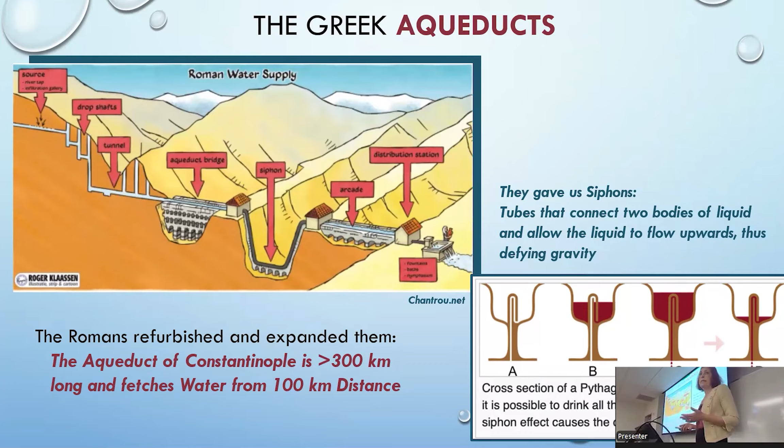Now, this didn't stop there. We see that innovation and ingenuity in Mesopotamia and their irrigation canals, really pretty fascinating. We see it in the way that the Egyptians handled floods in the Nile and used it to actually irrigate and grow crops in a very arid region. We see it in technology that they developed, this shadoof, the idea that you can haul water from one place to the other using what we now have more fancy names for.

And then you'll see the Nilometer, which is really a stage that measures water levels, like the ones you see under the freeways where we have flooding. They had that way back when, a long time ago. And then you'll see the Mayans, they had the first filtration systems, believe it or not. And you'll see the Indus had advanced urban, water, and wastewater engineering. So we're building on this great legacy of folks that have come before us.

Now we fast forward and look at what's happening in the United States in modern times. What you will see is that it took us a while, till 1872, to have the first filtration water treatment plant in Poughkeepsie, New York. And then beyond that, what motivated a lot of the water systems we work with today are the diseases and recognition that water is a carrier of disease unless it's treated and maintained and clean. So you'll see that chlorination began in about the 1900s, I would say.

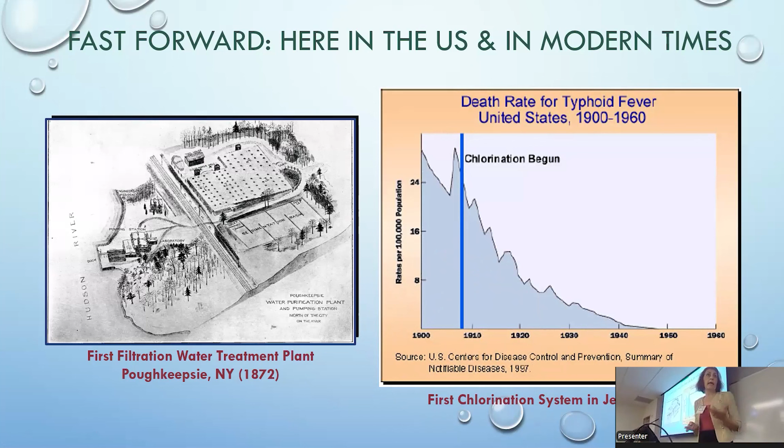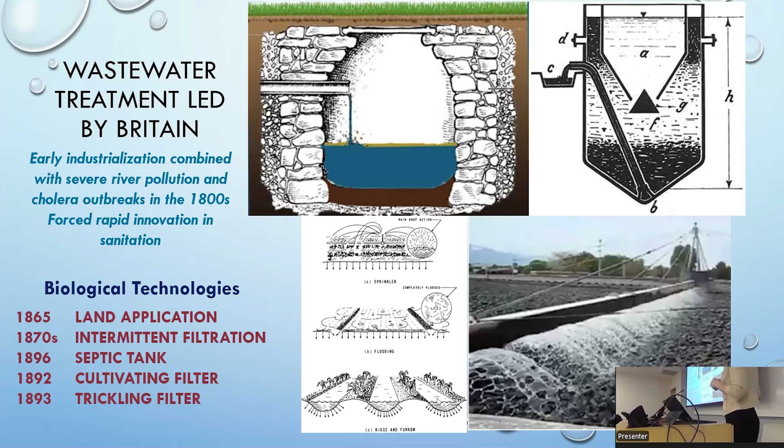And as a result, the deaths that came from all of these diseases started declining. Now the issue became wastewater, and Britain led the world with their technology. They did that because of all of the pandemics and outbreaks of diseases that decimated much of their population. So they gave us a lot of inventions, among them spreading wastewater on land application, intermittent filtration, septic tanks, and trickling filters, which you see here on the right.

Now, today we are at the cusp of having to change the conversation about water. What we're doing and have done to date is not going to serve us and is not going to work into the future. I'll tell you why, but I'll also tell you how we can get over that.

So first, we're going to talk about where water comes from. Believe it or not, a lot of folks really don't have a good handle on where water comes from. And then we're going to talk about how we design water systems today and why that is challenging to continue doing into the future.

I'll present a little bit about the Texas water story because we live in Texas. I live in Texas, I care about Texas and its water. And then we'll look at water from a different perspective, the economic perspective.

We then talk about desalination, perhaps in my mind an inescapable water future for most of the globe. And then we'll really make the case for the nexus of water, energy, and productivity, and water as the realm of the future engineer, where we have to be inventive and have the resources to get the job done, which is ensuring clean and safe water for everyone.

So, natural and unconventional water sources. We have surface water: rivers, streams, lakes, etc. We have groundwater, which we've depleted a lot of, aquifers, wells, and springs. Rainwater, that's where most water comes from, glaciers, and snowmelt.

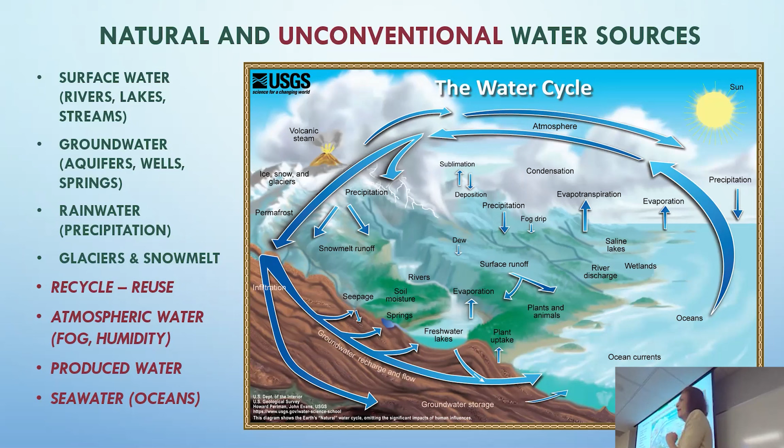Now recently, we began exploring what I like to call unconventional water sources, and these are recycling it, reusing the water that we've used before. There are technologies to grab water from fog and humidity. You'll hear about produced water today, so I won't comment on that, provided your speaker shows up. And then lastly, we're going to talk about seawater and the opportunities it presents.

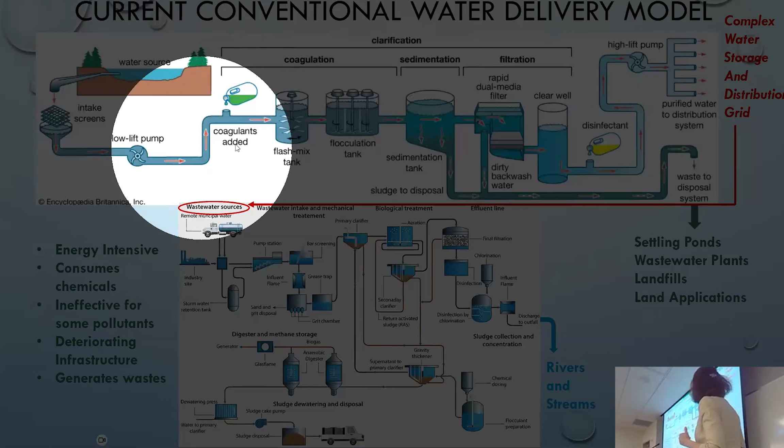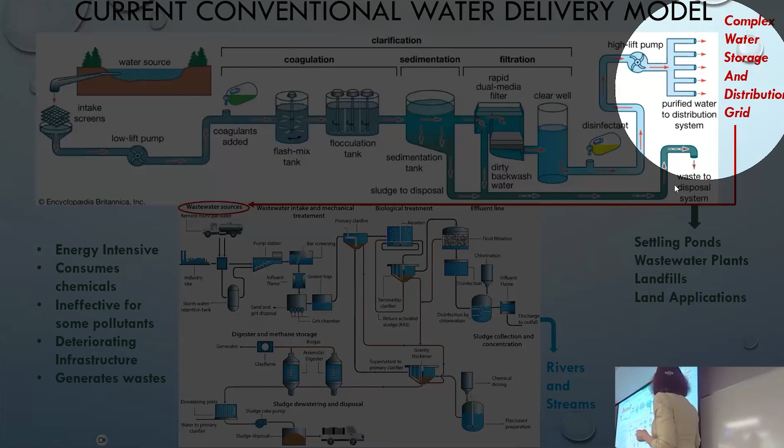Here's what we do to water today. Looks great, lots of work for engineers. So we start with a water source, usually surface water. We pull it out with an intake structure, and then we process it through these umpteen technologies that are quite heavy in engineering and technology, heavy on energy to run the water through them. And then we have distribution and storage, really complex networks.

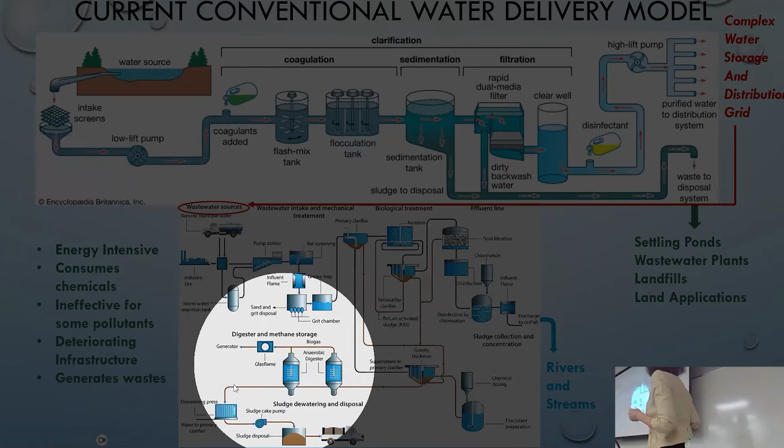When we're done with all that water, we take it back and put it in a wastewater treatment system, which is just as complicated. And the outcome is that the treated wastewater is discharged to rivers and streams. However, notice on the right, below the top picture, there's waste being generated, and the same happens with wastewater. We generate sludge, and that becomes biosolids.

The biosolids are spread on agricultural lands. So if the biosolids are polluted, then your food sources also have some of that pollution and could be harmful to humans.

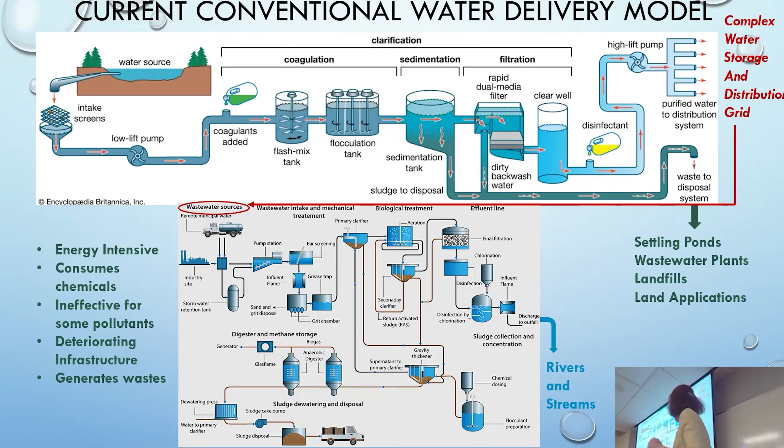So what is the issue with the current conventional water delivery model? From a technological standpoint, it's energy intensive, it consumes a lot of chemicals, and it's ineffective for some pollutants like PFAS and rubber from tires. I'll talk about that a little bit. And we, as you know, have deteriorating infrastructure, and the wastes that are generated are an issue that we have to deal with.

So other challenges with our systems are even more pervasive, because in times of water deficit, who gets to be first in line? There are many users of this water: agriculture, industry, municipal, commercial, the energy sector, environmental, recreational. So who has first in line?

And then beyond that, who's going to pay for new water sources? And how are we going to deal with emerging water users, mega users like data centers, which you will also hear about today?

Now some of the things we need to think about, be proactive: should we consider sharing water or transferring water rights or transferring water from one place to the next? And how would that work? Do you have the haves and have-nots? And how do you make that determination?

What to do when you have too much or not enough? These are the extremes of drought or extreme rainfall or hurricanes, whatever have you. And then is it likely that we can conserve enough to actually meet the demands? Is it likely that we can harvest from these really distributed sources like rainwater? What would incentivize people to do that? And then what about infrastructure retrofits to reduce water losses and conservation? How do we pay for all of that?

So that's what I'd like to talk about today, given that you are seeing these titles in headlines in the news almost every day. Wouldn't you agree, Louis, that this is from Microsoft?

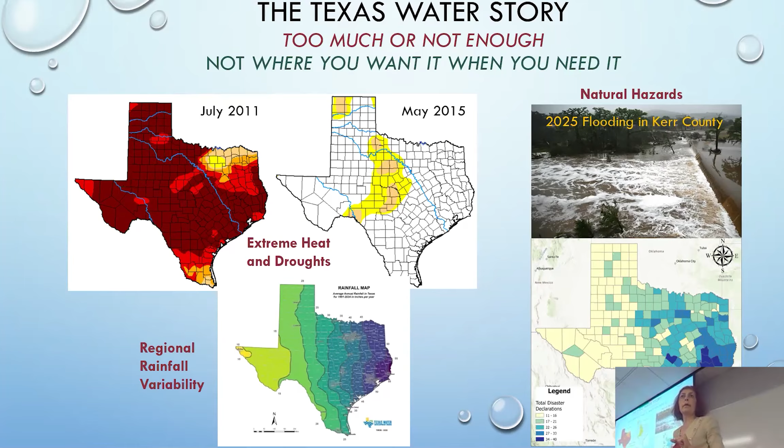We have flooding. This is just an image of the flooding in Kerr County. This is a map of all of the natural hazards that hit Texas, from droughts to extreme rain, hurricanes, fires, whatever have you. This is a disaster declaration count for Texas. So all of these things bring to mind that Texas, we have a problem.

And unfortunately, two strikes for data centers, according to a new report that came from Bluefield Research. Their theory is, their data demonstrates that the issue is not just the water use, but it's the power plants that are going to use more water to provide the energy for the data center. So that's where the two strikes come in, right?

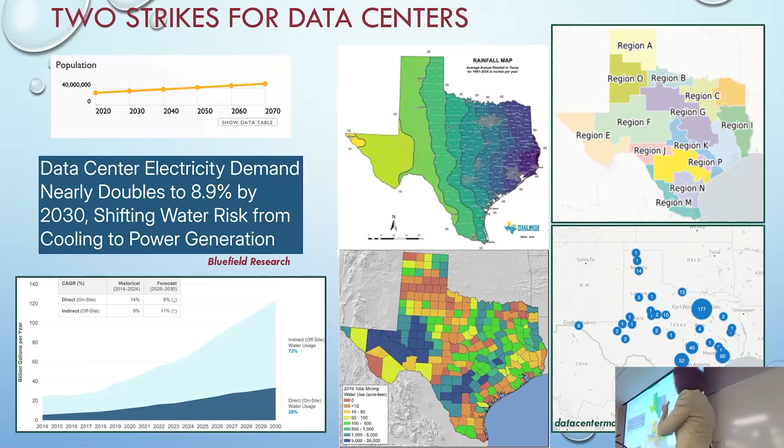So they're having to build power plants, get water for those, and they're having to use the water to cool the machines that are in the data centers. So two strikes for data centers that they're going to have to address, and this is real data from that report. It's online, you can look it up and read the report.

It's pretty interesting. So in the US in general, what have we done? We've had 125 years of US water spending. We've not been sitting idle. We have been paying for systems, right? But the thing to understand is the pricing of water needs to be better understood, and we need to price it right because it is the resource of the future.

Now, I'm giving here some examples. I'm not going to go into them in detail, but I get water from the city of Houston. I pay maybe about 5 or 10 cents a gallon on a good day. Now, if I use a lot of water in the summer, that number jumps up, right? But this is a gallon of distilled water that you buy from the store. You'll pay $1 to $2.50 for that gallon of distilled water. And the reason it's expensive is the cost of the amount of gas that goes to make that distillation system work.

And it's 0.15 gallon of gasoline equivalent in BTUs needed to generate that gallon of distilled water. The rest of the cost is in the plastic and trucking this gallon of water all over and selling it, and people have to make money along the way.

Now, what's interesting is in comparison, the price of gasoline, well, not today, I haven't filled up yet. At least it was last week, $3.10. I'm not sure what it's like today. But the point that I'm trying to make is that we spend about $1,200 per capita in the US on water. 2.2 billion do not have safe water. 40% of the world will face water stress by the year 2050. We need to price water right in order to get beyond where we are today, where there are these dichotomies in pricing, and we'll explain why.

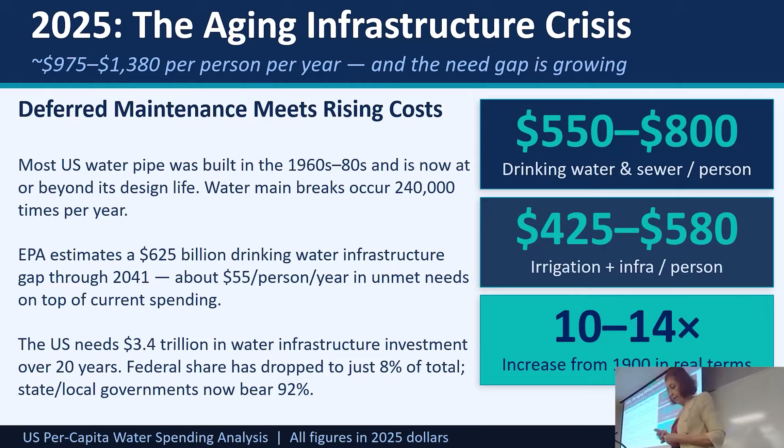So the difficulty or challenge we find today is you need to spend a lot more than $1,200 per capita. Somehow those funds have to be found. So the key takeaways: we have a big infrastructure gap, our pipes are aging, and we're spending far less than what we should to ensure safe and clean water deliveries.

Now, water demand is relentless. The fact is that it keeps increasing. We have population growth, urbanization and industry. We're going, as I said, from farming to manufacturing to information technology. So the water demand per capita is going way up.

For factories, plants, cooling systems, they all require water. And then data centers and AI, the digital economy, we call it water hungry. One data center can consume about 3 to 5 million gallons per day. A family of four typically would use about 5,000 gallons a month. So you can kind of think about the equivalent number of people that are replaced by the need for that data center.

And then we have more coming with AI and quantum computing, accelerating those needs. Now we have stressed natural sources—we've depleted a lot of the streams, rivers and groundwater aquifers. And unfortunately, we're all facing issues like drought and other risks affecting those sources.

In addition, legal frameworks are lagging behind physical reality. So in Texas, you cannot transfer water across watersheds. You can borrow water—Houston borrows water from the Trinity, for example—but you can't transfer that water from Houston somewhere else. And then we do have opportunity sources, and that's where we need to think pretty carefully.

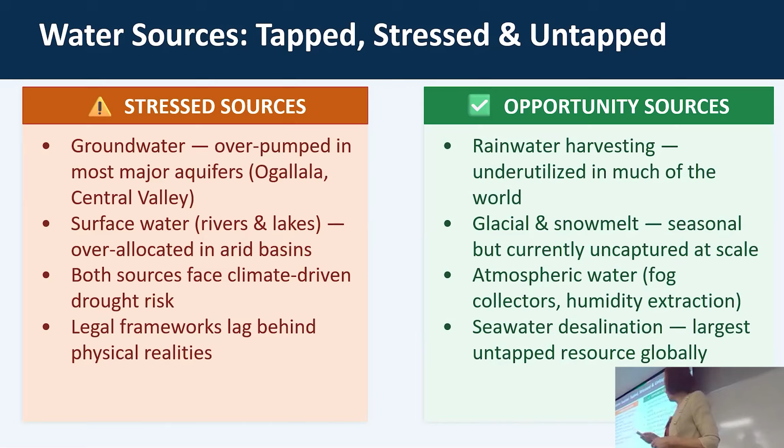Rainwater harvesting is underutilized, and there's not a way to convince people to do it if you don't incentivize it, kind of like using solar and wind and other technologies. Glacial snow melt is seasonal, but it's not captured at scale. We have technology to collect water from fog and humidity, and at least in my humble opinion, seawater may be our largest untapped resource that could help us out in the long term.

Now, the good news is not everything we do is bad. Current technologies, the current water distribution model, is not a bad one. It does have issues that come with it that we need to resolve.

Emerging contaminant crisis: we went from infectious disease—we handled those with chlorination and all that—but now we have these emerging contaminants that are quite problematic. PFAS are forever chemicals, literally everywhere and in everything. So it's pretty hard to get a handle on those.

Microplastics are in the same domain. And then lastly, the new emerging chemical on the block, 6PPD-quinone, comes from tires shedding rubber—they're added to tires to make them last longer and maintain their properties. Unfortunately, they shed, and this compound is totally toxic to salmon and other aquatic life. So right now, a lot of research is going on to see what we could do about this compound.

Now, wastewater, on the other hand—the good news is it went from being sort of a nuisance to becoming an intelligence asset. We've done a lot to identify disease in wastewater effluent from communities so we can preempt any kind of outbreak. COVID is one of those, but now we're looking at the flu, RSV.

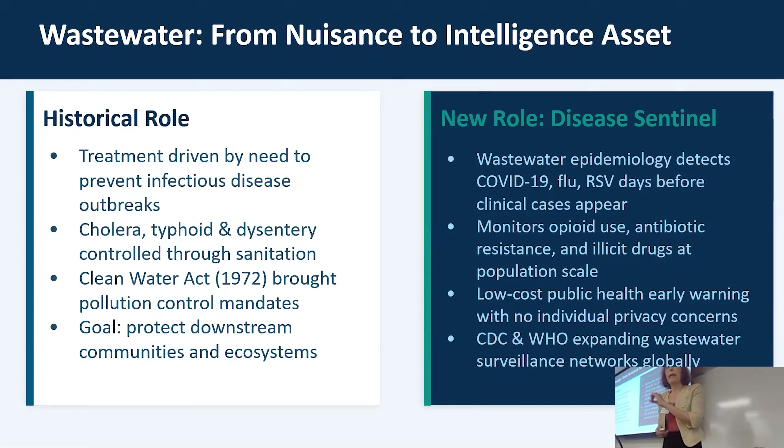We can monitor—and of course privacy notwithstanding, we're not addressing that today—opioid use, antibiotic resistance, and illicit drugs; you can monitor that at the population scale. And then you will find that these systems are now early warning systems. The CDC and the World Health Organization are really expanding their wastewater surveillance networks globally.

Now, expanding supply without new sources, is that possible? Well, we're trying everything. We're looking at recycling and reclaiming water, capturing stormwater and trying to do something with it, and we are looking at produced water.

One of my student teams won the Texas Water Challenge several years back. They proposed treating produced water. We can also improve conservation by separating our systems, so gray water like kitchen water is separated from bathroom water. That gray water may be a good reuse opportunity, along with infrastructure rehab.

Let's take a look at what Texas is up to. This is all data from the Texas Water Development Board, available online. On the top right, they're showing where we are today and the gap we will face by 2070. The red is how much more water we need, and the green represents strategy supplies, new water we have to come up with to meet that red bar.

On the top left is a map of all the reuse potential of wastewater. If we're going to take all that wastewater and reuse it, that's how much we have to work with. Next to that is the technology of managed aquifer recharge.

Some of you may have heard of it, but basically you're trying to reintroduce water from rain, stormwater, or treated water. You replenish these aquifers so it's stored, and when you need it, you can pump it back. The few dots shown are the few places doing actual testing of some of these technologies.

On the left is the TWDB assessment of the potential you would gain from harvesting rainwater. This map is dated, from 2019, so I'm not sure it's reflective, but it shows the areas with the volumes of produced water they generate.

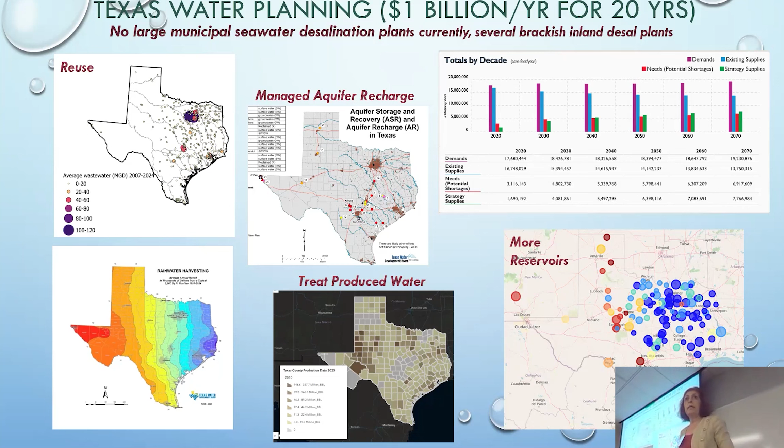All the reservoirs in red have already lost a significant volume of the water in them. That's the issue with reservoirs: if this drought continues, all the blues will also turn into reds, and that creates a significant problem for all of us. So Texas is exploring all these options, but my guess is it's not going to be enough.

So seawater, the world's largest water reserve. Most of the earth, as you know, is seawater. There are things that really support looking at desalination. Unlimited supply is right there, it's literally free, and technology costs are declining.

We also have a location advantage in the sense that many people are moving to coastal areas because they have temperate climates, and it's climate independent. The ocean is not going to dry up when we have a drought. There will always be water.

Now, some of these technologies aren't very expensive. This shows some of the places that have already embraced desalination: Saudi Arabia, Gulf states, Israel, the United States, Spain and the Mediterranean, China, and Australia. Their primary drivers are different, but essentially that's why they're investing in desalination.

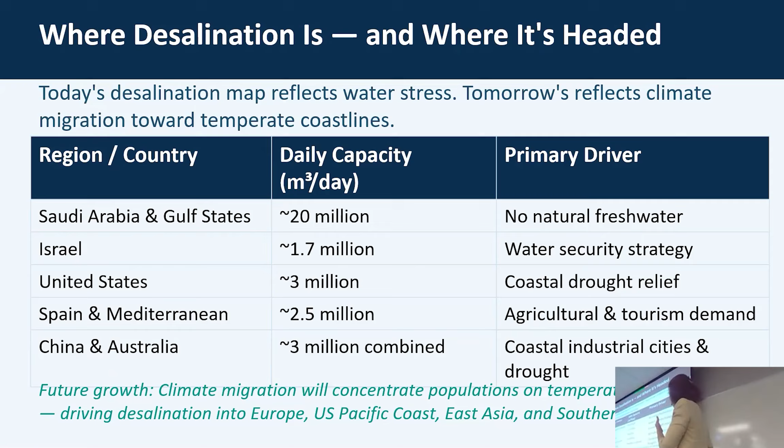In the future, migration due to climate extremes is going to concentrate populations along the coast. Therefore, if we're going to meet the needs, we may have to basically move towards more desalination in almost every country in the globe.

Now, the core challenges with desalination: it's not an easy lift. Energy cost, time to implement, climate variability, and delivering it where needed. We haven't surmounted those challenges, but we can address some of the needs, at least of the coastal areas I mentioned earlier.

This brings me to the rime of the future engineer: connecting water and energy systems, because without doing that, we would not actually be able to achieve our goal.

How we do that is we use water to make energy, and we use energy to treat water. That symbiotic relationship has to be built and has to be part of every new system, retrofit, or idea that we think about. I'm working with students on hydropower because that's really the most likely large source of energy generation using water, and it's historically been used forever.

We're looking at in-conduit power. When you move water from high places to low places, we try to depressurize the system so the pipes don't blow up. Maybe we can grab some of that pressure differential and turn it using a turbine into energy. It's possible and doable, and the system already exists, so it's not a retrofit, it's an add-on.

We're looking with students at marine energy technologies to generate energy, and then osmotic power. A paper just came out about floating droplet electricity generators—basically, you can generate power from raindrops.

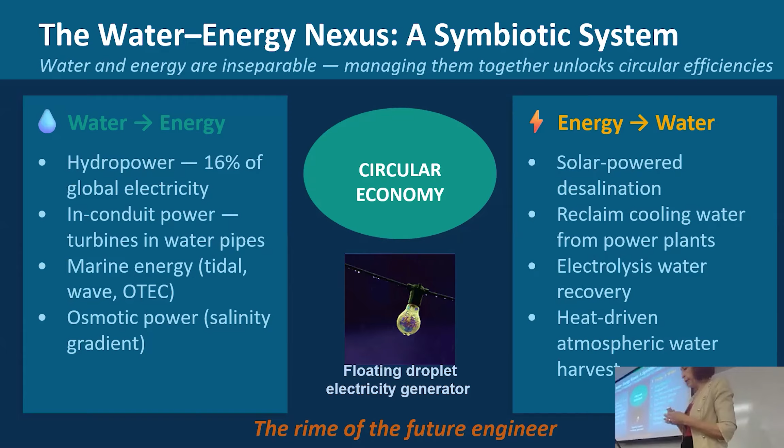Pretty interesting. So data centers, the challenge—they use a lot of water. I didn't know that training one large AI model will use 700,000 liters of water. That's pretty astounding, it's a lot of water.

The global data center water use will triple by 2030. Most of these data centers are sited based on energy cost, not water availability, and that's creating all kinds of problems. Now, the opportunity is to co-locate them perhaps with desal plants and power them with ocean wind, return treated water as fresh water, recover waste heat—many different ways we can think about capturing the opportunity with these data centers.

And then if we're going to build them, maybe think about building campuses relying on circular economies, where we combine data centers with renewables and water treatment technology.

Wealth enables water and water technology. As you know, emerging or developing nations don't have the resources, so they still are without sewered water systems, whereas where you have money, you can actually afford technology.

Israel is leading in membrane technologies, and they have turned the desert into a lush green garden. And then Libya, the great man-made river—if you've never heard about it, look it up online. It's amazing how they pumped water from the groundwater in the desert and carried it to the coastal areas with this really ginormous tunnel, basically.

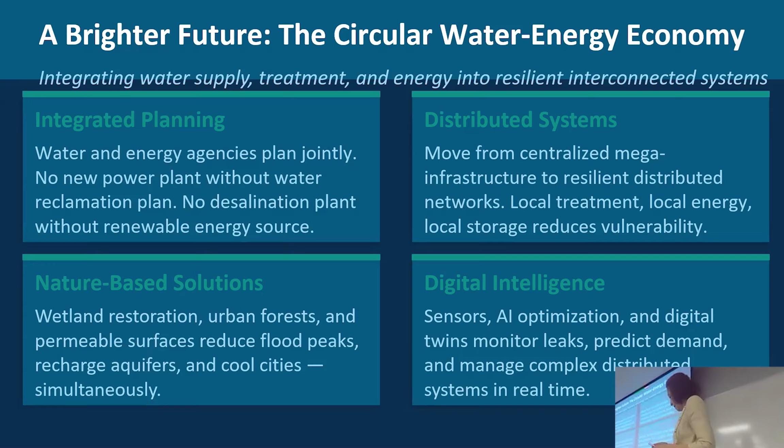I'll stop there and leave you with the thought that water security is national security, and the choices we make in the next decade with desal, water reuse, infrastructure investment, and energy integration will determine whether the world's growing population will have access to safe and reliable water. Thank you very much.